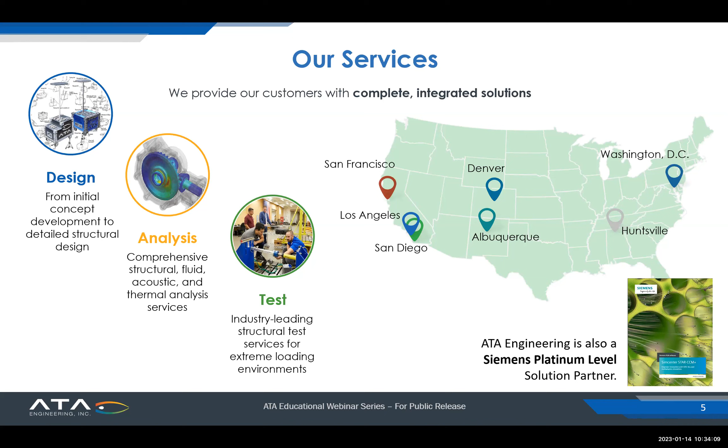ATA Engineering is also a Siemens Platinum level solution partner, and we provide a full range of services for Nastran design, simulation, and engineering products, including AMESim, which is also sold under the brand SimCenter 1D, but NX, Nastran, FEMAP.

Star CCM Plus, SimCenter 3D, TeamCenter, and a great number of other products as well. As a value-added reseller, we provide licensing and support for all of these products. We are also a principal provider for Siemens training.

And in fact, the tutorials and training materials for Nastran, the principal Siemens FEA solver, are actually written and maintained by ATA Engineering. And if you sign up for a Nastran class with Siemens, you will discover that it's in

Herndon, Virginia, or Albuquerque, New Mexico, or Denver, Colorado, or Los Angeles, or in San Diego, because those are where our offices are located, and you will find yourself being taught by an instructor from ATA Engineering.

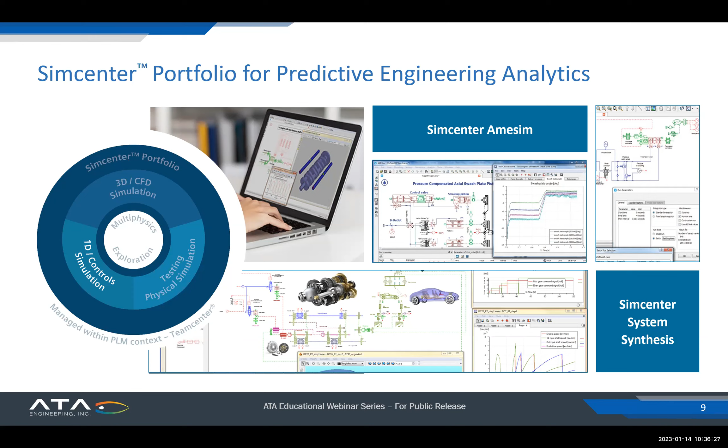It can manage things like fuel economy and energy management, structural integrity and durability. So you're actually determining whether or not your machine will operate safely. Operability and efficiency, noise and vibration, a great deal others, all within one very comprehensive tool.

The AMESim tool is used for pre-design studies. It's a particular strength for helping you do what-if analysis and trade studies on systems for which you don't have all the information. You don't have a full 3D model for your deployable space structure. You have a general idea for the area of solar panels you need to deploy, the weight of those panels, that sort of thing, but you don't have all the details. AMESim is a wonderful way of drawing a box around your variables and doing sensitivity studies to determine the most likely configuration for your system that's going to lead to success.

It's used for system sizing and integration, performance balancing, particularly trade studies, to make sure you have an optimum approach, balancing out all the different design criteria, validating control systems, and connecting in a system model all the different individual pieces that make up a complex system. These could be hydraulics, pneumatics, thermal, electrical, mechanical, signals, etc., all within a single model.

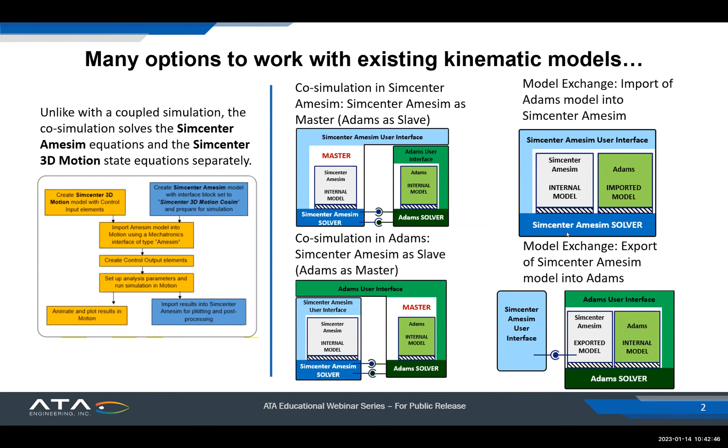The other option, of course, is if you want to start with the clean sheet approach, and you're either at a satellite startup or you have a completely new idea and you want to start almost from a napkin sketch of, here's your idea, how do we start with nothing and move forward, and use AMESim to start working through kind of a requirement space, or requirements don't almost exist at this point. You're just trying to see what can you do, what's possible.

AMESim fills, I would say, one of the best jumping off points from a napkin sketch moving forward into software, where you don't have to necessarily go through all the work to get a 3D model and then do kinematic analysis and then electrical analysis, etc. You can simply use one product, Siemens AMESim, and start from the basics, right? What you had dreamt up from a napkin sketch, and start moving it forward before you actually move into some of the more specific software packages to bring your design forward.

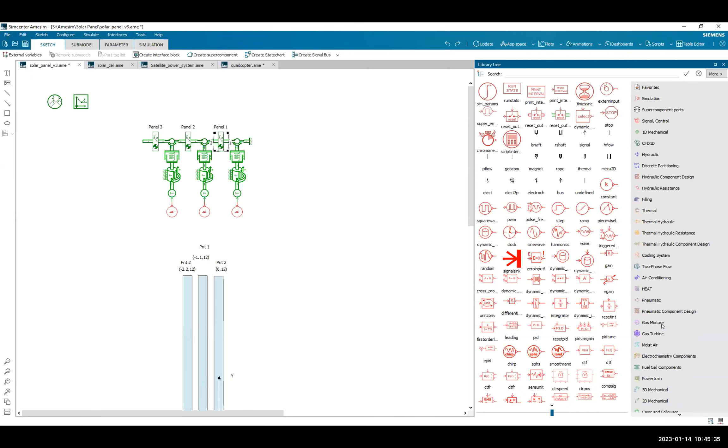By using the library and understanding what you want to do, each of these libraries has a number of different components built into it that you simply drag and drop onto your workspace as far as how do you want to hook items up, as far as building the system you want. As far as, I just built a small tank here with 6 different ports and then a temperature sensor fixed onto it. That's how fast it goes.

So for the solar array, what we're working with today is just a solar array with 3 panels. Each of these panels is modeled at each of these locations here. And then at the connection between each of the panels, and also back to, say, the satellite or satellite bus, there's a pivot joint here that is given some inertia and then given some torque essentially to model the change in position.

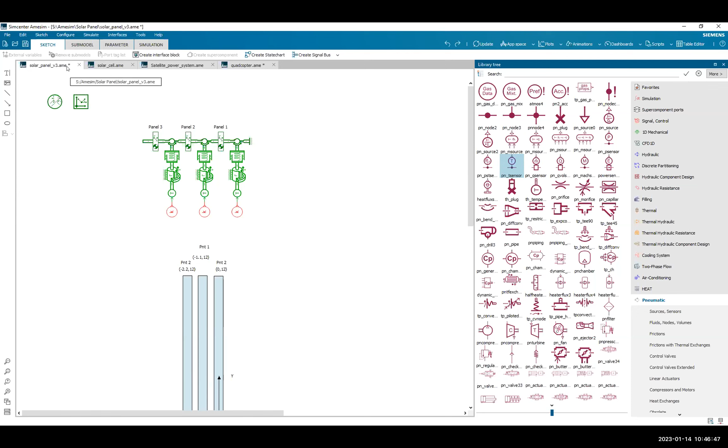So once I've gone through sketching and modeling here, next up would be assigning submodels. So not only within each library and the components, there's also within each component, sometimes one or multiple submodels, depending on what level of modeling detail you want to capture. Meaning, do you want to bring in pressure effects? Do you want to consider thermal effects? Do you want to consider many different aspects that some of these components may have associated with them?

And with that, I can click on any one of these, and it'll tell me which submodel's been already defined. And then it brings up also a window here, external variables. So this is not just a pretty picture in a schematic. This is a true representation of the component and the kind of inputs and outputs to it. I'm trying to open up this window here so you guys can see, as far as absolute positions, absolute velocities, accelerations, torques, forces — a number of different items are being calculated through this particular component as part of the simulation.

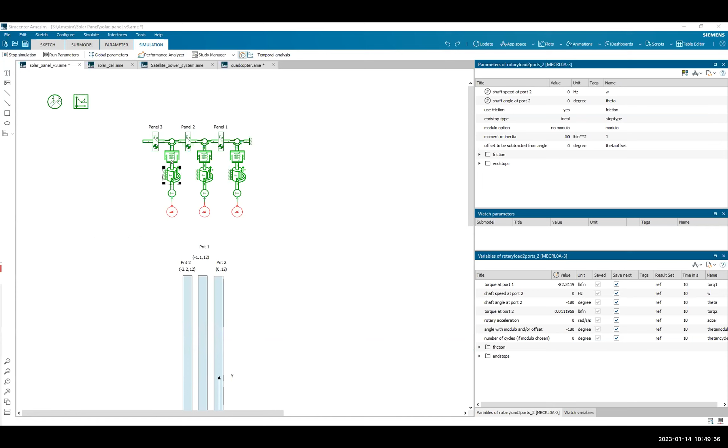For this particular system, my run is over on the other screen, but it runs just that fast. Let me go through it one more time. Starts at 0 to 100%, and it's done.

From there you can check on any of these components and see what was done. For instance, panel 1, the position of point 1, right by the satellite, didn't change, but the position at point 2 did change. It folded out. This is a 12-inch panel, and it folded out away from the satellite to its full extension of 12 inches.

Took, in this particular analysis, about 1.1 seconds. I can't really see what that is, so let me pull it up here. I'm at 11.99 after 1.16 seconds. It's just that easy to create plots of what's going on.

Panel 2 - its point 1 was following point 2 on panel 1. Panel 2's point 2 is out at 24 inches. So you can kind of see where it went through the animation and how its position changed throughout time.

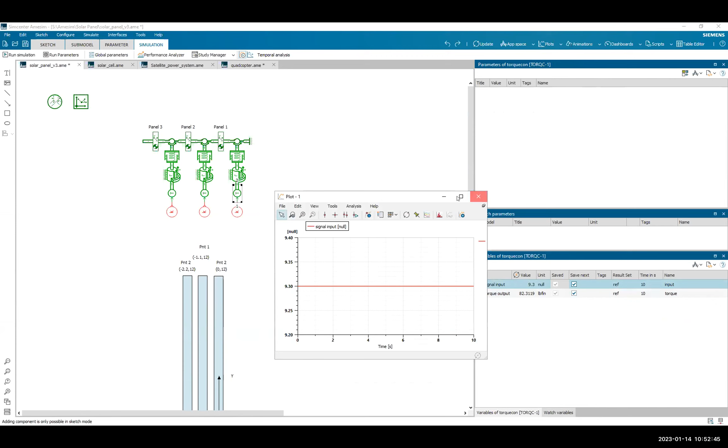The other thing I wanted to see was the output torque. Output torques are constant, signals are constant. So all the information you could find out about panel extension comes through just a real simple model.

Moving on - this is a solar panel that we're working with. I wanted to also show, on this panel, there's of course an array of solar cells, and there's a lot of information as far as how much energy is being developed, and what models are present in the software.

So we're going to back up again to the sketch phase one more time, where just a simple model was created. Certain submodels were chosen for these particular components. I believe they're quite simple - not a lot of specific different types of submodels are related, but the parameter section is quite significant.

Right here we have, for the solar cell, a gallium arsenide solar cell being modeled. What makes this a gallium arsenide solar cell is the specific energy gap at 0K value here, and then the energy gap fitting parameters A and B. These are specific to that type of solar cell.

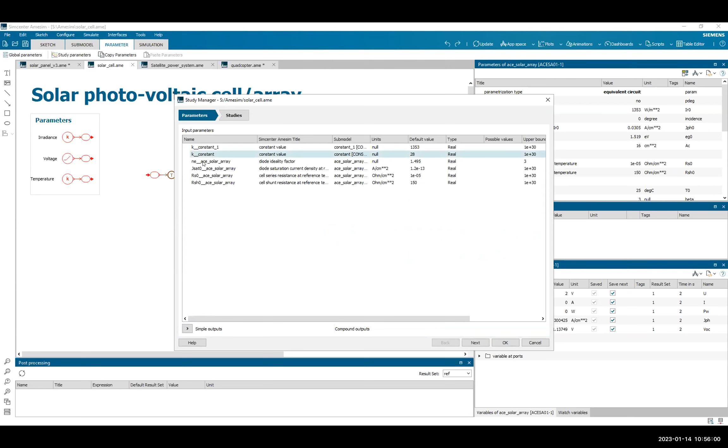Those are all done by setting up design studies where you can see, with all the parameters we just discussed, how some are held constant for a set of 3 analyses, while such as this constant value - I believe this is temperature - is swept for that design study. Then what happens next is it's held constant while another one of these parameters is swept. It allows you to do a quick design study just by naming and defining parameters, then defining how values are swept.

Again, we're going to run the solution, and as you'd suspect, it's going to be doing 18 different analyses, but because this is a 1D system, relatively simple, this goes relatively fast.

As this finishes up, I'm going to pull up a couple plots that have been predefined here so that you can see them.

This is an example of, on a solar array, the temperature effect on cell performance. As temperature increases, the semiconductor band gap shrinks, which causes the open circuit voltage to decrease. This shows the effects on the solar cell with respect to temperature.

There's other things that were done as part of this design study as far as irradiance. This expresses the radiant flux received by a surface per unit area, so you can see how that changes with respect to different settings on the various parameters. You can almost take this model, compare it to literature on the solar cells you've selected, and make sure

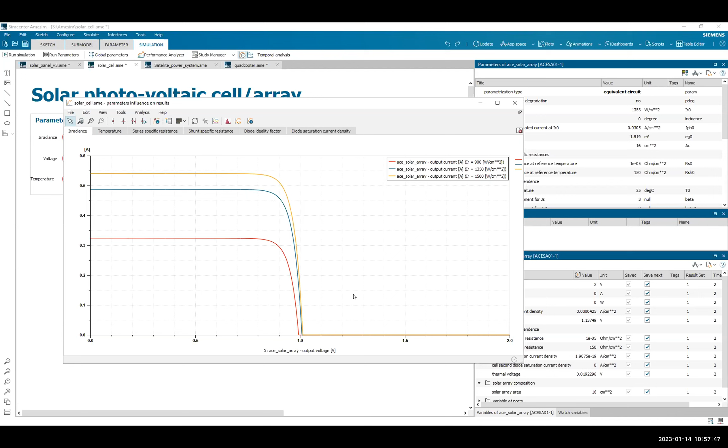it's behaving correctly once you go into modeling. So this is excellent for building up different iterations on parameters and seeing how things such as temperature, pressure, etc. affect the performance of the various components in your system.

So moving on, next I have a solar array. I have it extended. I have solar cells on it, and they're getting this much solar energy. What one could do then is plug that information into an overall system model of a satellite.

What's great about this is you're not just talking about the solar cells or the solar arrays, but how that is supporting the energy being delivered by the battery with its regulator, and then the various electrical loads on the satellite, be it mechanisms, propulsion systems, communication systems, etc. You could take the information from your cell and solar array and plumb it into a diagram such as this. I'm just going to run it.

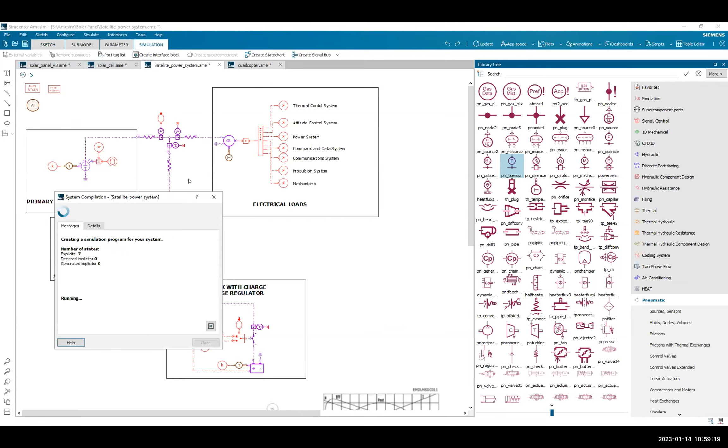And again, this is something with library components that have a lot of information and physics built into them, modeling very closely what you would typically select from catalogs.

And you could see, say, maybe solar irradiance as you're going through particular orbits, and how it's dropping off at different areas of the orbit.

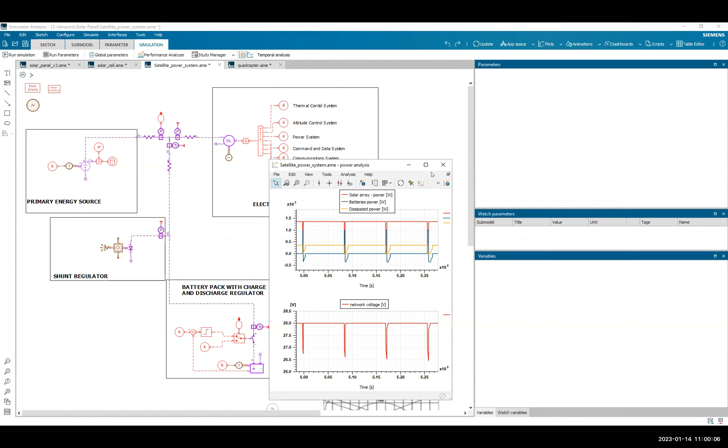And then a power analysis. I'll bring it over here too, as far as what's being provided by solar arrays, batteries, and you can see the battery fill as your solar array's power is dropping off throughout an orbit. Then total dissipated power is given by the yellow line. You can see how all these systems work together for the modeling using the software.

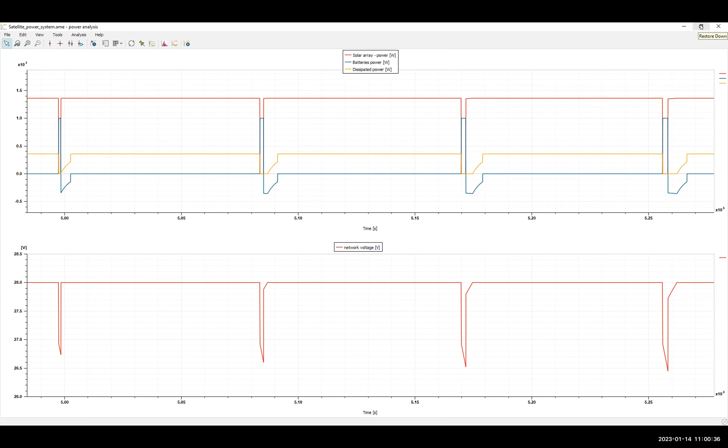Okay, so one thing I wanted to add, I'm just going to go back to the PowerPoint before I go on to the next topic, but not only specifically on the solar panels,

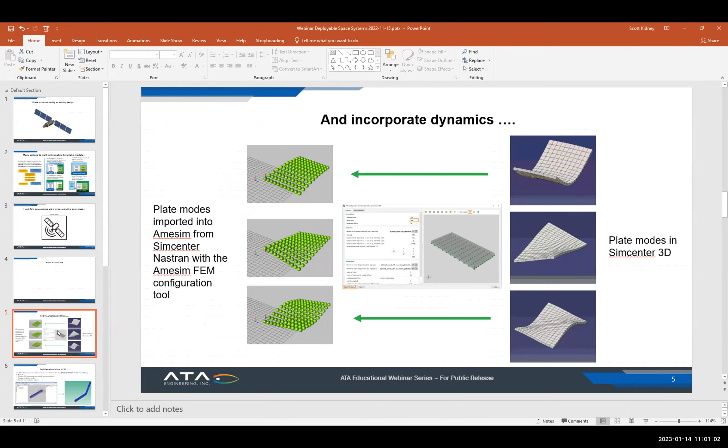the software also has the ability to pull in mode shapes. We've been talking about kinematics and specific positions of panels, etc. But you also have the ability to incorporate dynamics and pull in the dynamic information from any of your finite element analysis solvers. So if you get to that point of modeling the system, you like the panel design,

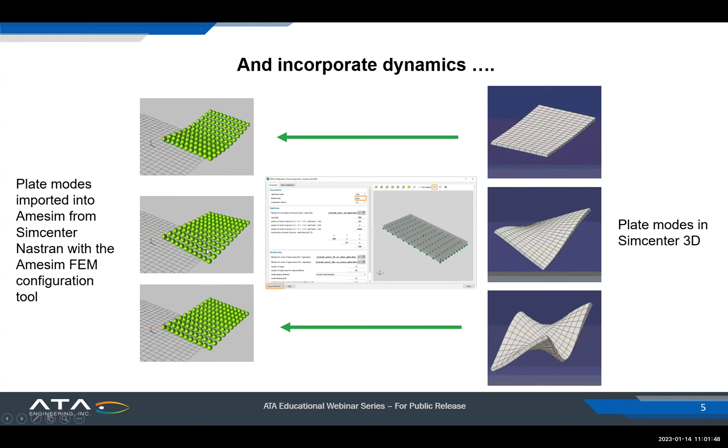you like the panel size, you run that through FEA, you get the modes, you bring it back, and you can put that information into Amesim and have not only transients, say due to hinges hitting stops or whatever while a solar array is opening up, but also the dynamics of the system and how that may affect positions and joint loading.

The other thing too is you can go one step further. Instead of a 2D type analysis, you could also go into 3D. And there is an assistant that would allow you to set up a 3D model, 3D joints with motorized joints, etc.

So maybe you're not doing a solar array, but say perhaps an arm. It does have all the modeling information built into the software to handle arms, different joints, degrees of freedom, inertias, etc. that would be necessary for that particular type of analysis. And of course, you could set up an animation that allows you to see how this is moving in real time.

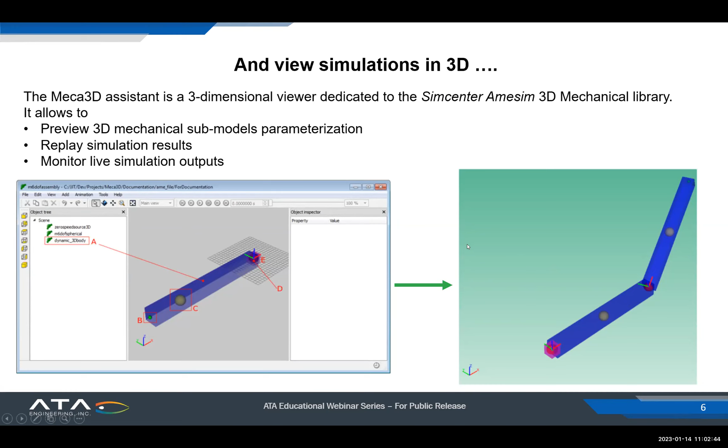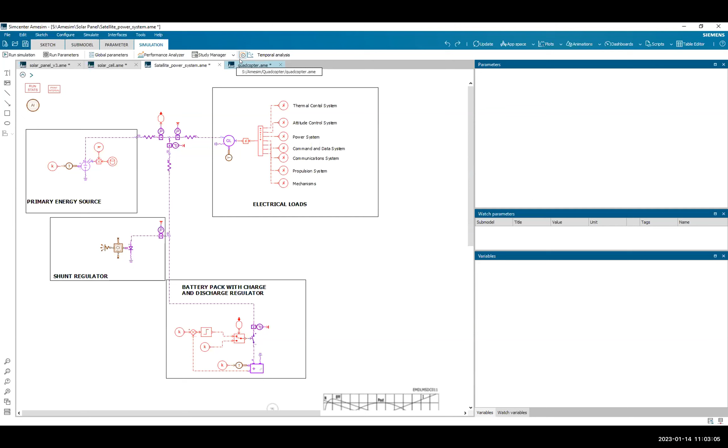Okay, so now switching gears a little bit, we realize the needs of the audience have different needs. It's just not space flight. There's a lot of people interested in aircraft and quadcopters and other types of flying machines, but wanted to show how Amesim would also work with respect to, say, a quadcopter design.

So you can kind of see how Amesim doesn't just focus on one area of a system and that's what's best at. It focuses on many different aspects as far as batteries, motors, propellers, what's your lift, how does this behave, flight dynamics, etc. It'll model everything, and that's where it really is strong at.

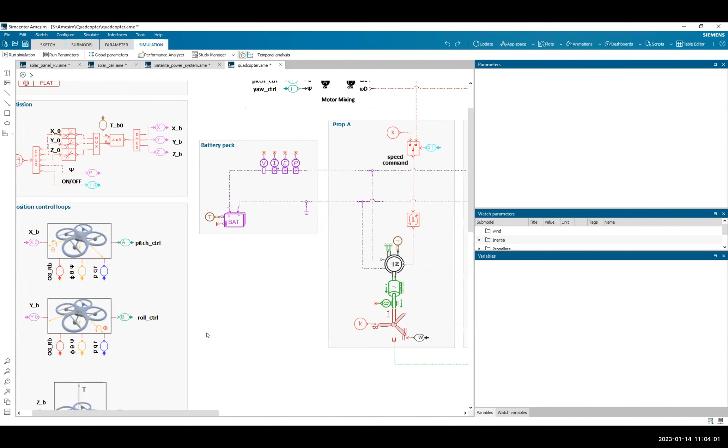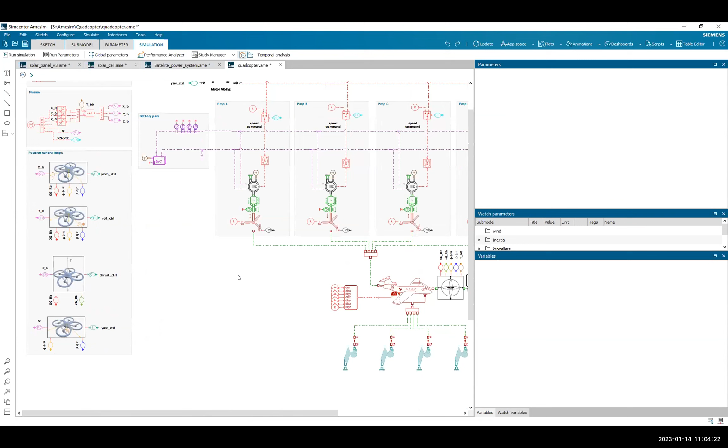So we wanted to go through a quick intro to a quadcopter exercise with the software, just to show what's going on. This is kind of state chart driven. As far as you have a particular environment that you're flying in, a particular mission, and then you have control loops for all the various rotors on the quadcopter, and then you have the quadcopter model and the aircraft model on this right-hand side, so that the control and the mission feed into each of the 4 motors and 4 propellers fed by a battery. That feeds into what are the flight dynamics of this particular system for a particular mission.

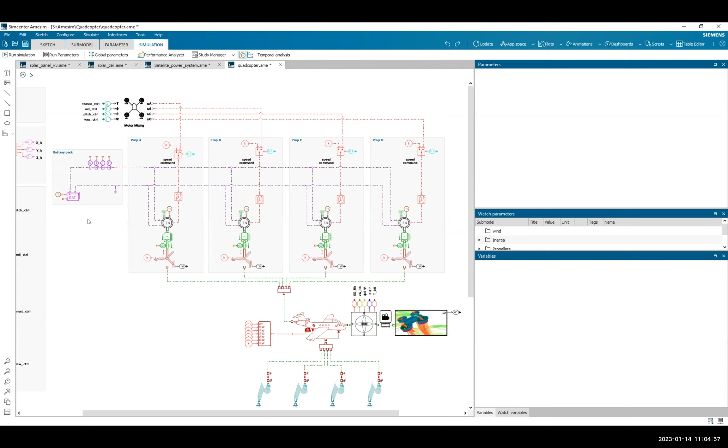And you guessed it, there's an animation built into here, so the movie will show you the animation of how this flies and performs throughout. But you can see a number of different areas being touched here. Once again, we looked at mechanical systems with the solar array, but now we have batteries, motors, a lot of the batteries, motors and mechanical we saw in solar arrays, deployable arms, but then also now propellers, which you could see in any number of aeronautical systems.

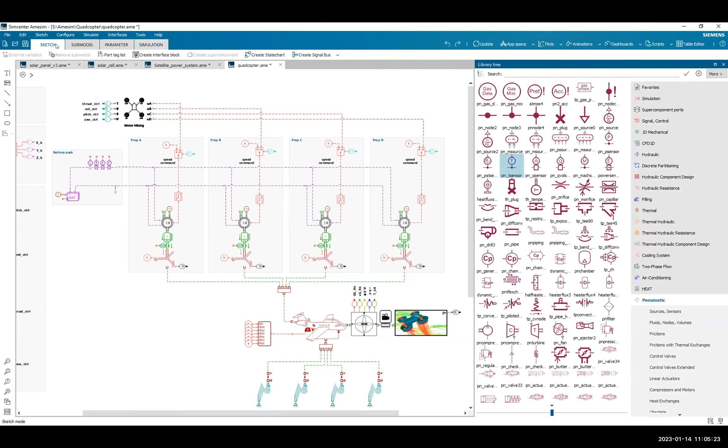So I'm going to start first by backing this up to sketch, and I think I want to go to parameters here, just to take a look at this. A lot of these have additional settings too, so they're just not going down a chart and filling out information. They do have additional interfaces that pop up and allow you to either import geometry or add additional information as far as specific airfoils or pitch information with respect to the blade design, say on this particular propeller.

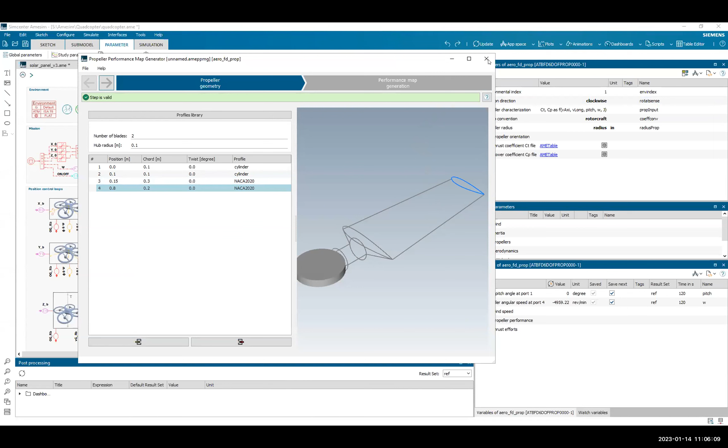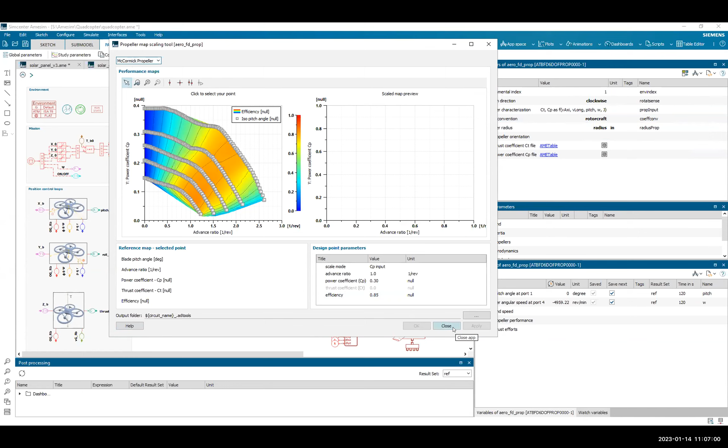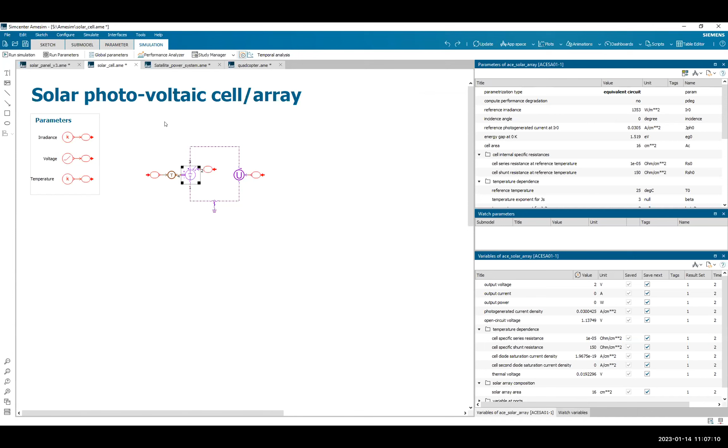And you can see too, this is probably not where you would start, just from a napkin sketch. There's a very layered approach to Amesim that you can start with very simple models. The solar cell model is a great example of that, where you can just understand how the various effects of temperature, etc., affect your solar cell. And then you can build it up to a much more complicated model, such as having specific propeller geometry built into, say, a quadcopter analysis or demonstration.

So again, we have 4 motors running a quadcopter, and that's this particular analysis. I'm going to run the simulation here. So just like that, I have all the information as far as what torque is going into each of these propellers for the given mission profile.

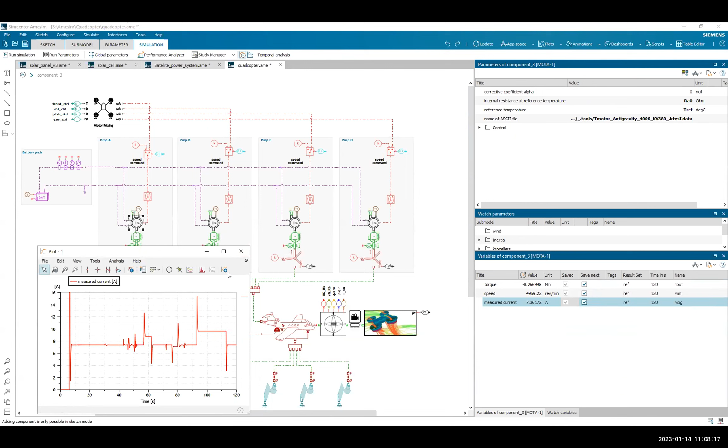I have speed, what's the controlled speed, what's happening. And again, plotting is just as simple as dragging and dropping onto this white space here. And of course, measure current, and this is for one particular propeller, so you can take a look at amps drawn, etc., for this quadcopter.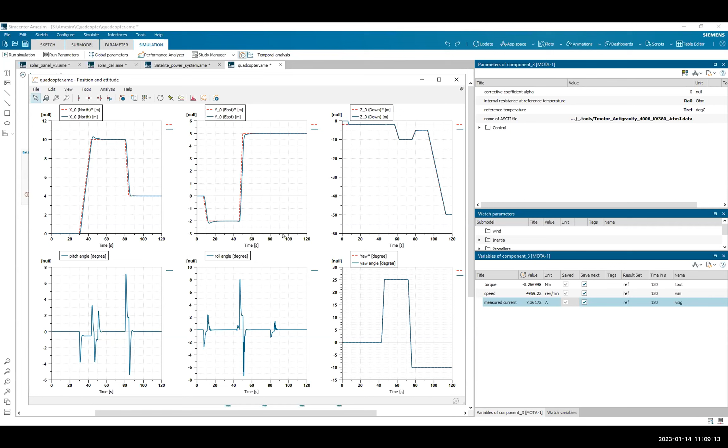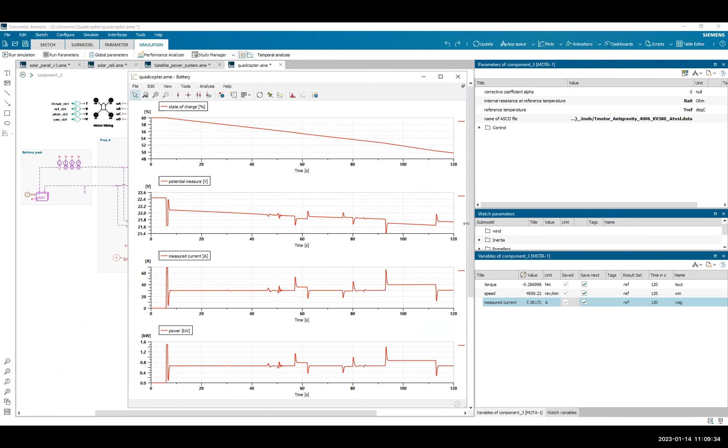Also, like I said, it's not just tracking flight dynamics, you're tracking a number of things with this quadcopter, as far as what's the state of charge of your battery potential, what's the voltage drop throughout the whole flight sequence, measured current, etc. So it's capturing and running through, as a quadcopter does its motions.

Looking again at the 3D visualization, this one does have an animation associated with it, which I probably broke. Let's try this one more time.

I may have really broken it this time. Cool, so let me just keep going here, but I can see if I can get this back. Let me see if I have something fun up.

So how about this? I'm going to let this figure out itself what's going on, and what I'm going to do is go back to the slides. And if I do get this to work, I'll show the animation and see what's going on. But as far as the slides are concerned, let's see.

Hey Scott, could you let me take over for a minute? Let's stop sharing while you try to fix it. Absolutely, yep, and I need to make sure I'm on the right page. Yep, I am.

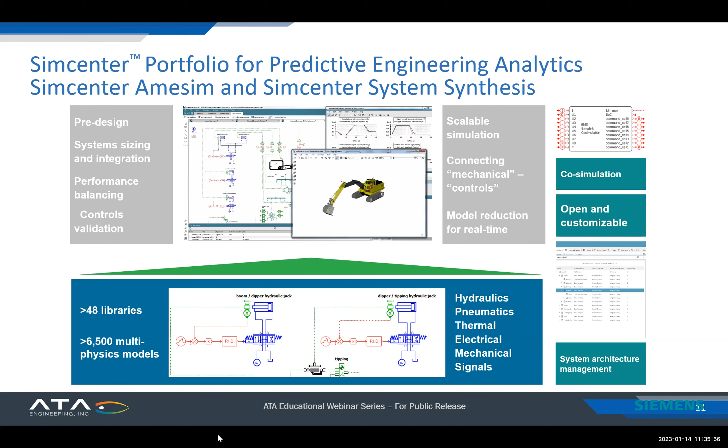Yeah, could you just stop screen share, and then this is a perfect way for me to jump in. Let me find my controls here, they've been hidden. There they are, awesome. Stop, go, okay here we go. Share is loading. Scott, just a minute - is anybody driving a Toyota Corolla? Big one in the front. No? Okay, thank you. No problem, go ahead - it's a parking issue.

Oh okay, no problem. I just needed to restart the software and resolve, and things are working good once again. This is the quadcopter once again, and this is just a simple CAD model dragged into an environment. Based off of your analysis or the information generated by the solution, you can allow that to set different animation values for this particular scene.

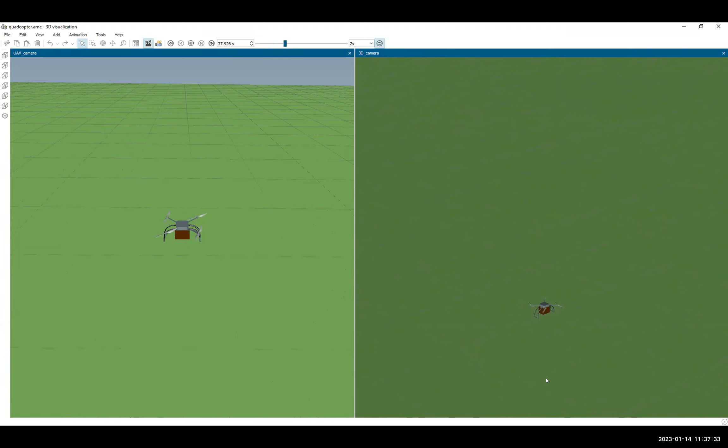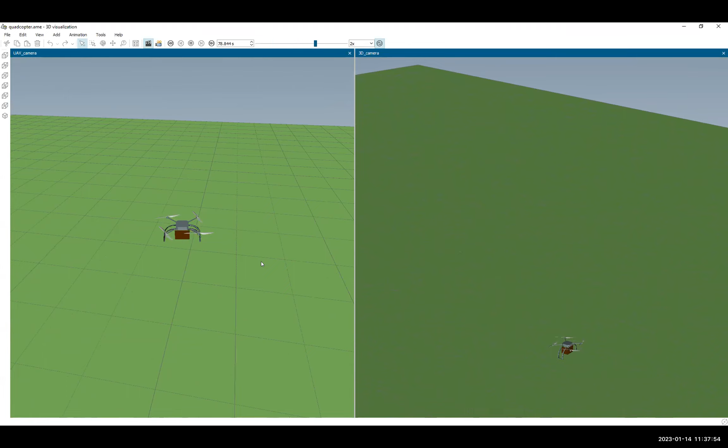As I run the animation, this is what's happening through the analysis. You can see the flight dynamics or flight program specified for the quadcopter. It was raised up to a certain position, and now it's going to go through a left and right movement as the flight regime proceeds - a couple of repositionings, and then you can see some bounce as it goes through a position-and-hold type maneuver.

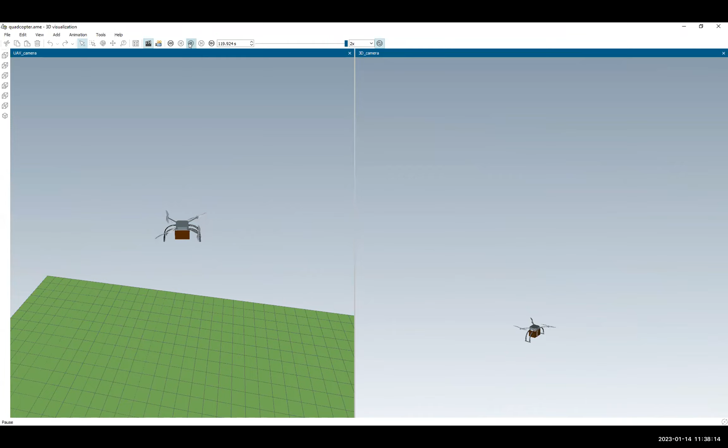So very simple animations, but you can still see what's happening in a scene and what the responses are. You're seeing a lot more information perhaps in an animation than, say, a graph of the position of the quadcopter as it's doing its maneuvers - it's a lot of information. Again, a picture's worth a thousand words sometimes.

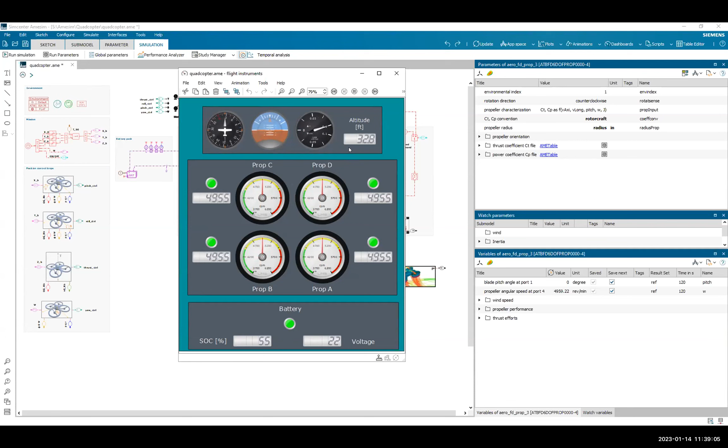We already discussed battery positioning. The other thing you have available is you can set up a flight instrumentation type scene here - I'll play this animation, and you can see a graphical display of the speed of your various propellers, battery voltage, etc. As it goes through the flight maneuvers, you see what the flight instruments look like - compass, attitude indicator, vertical speed, altitude, etc., all digital. So there's a number of different ways to show what's happening with the system - through plots, animations, and this dashboard here.